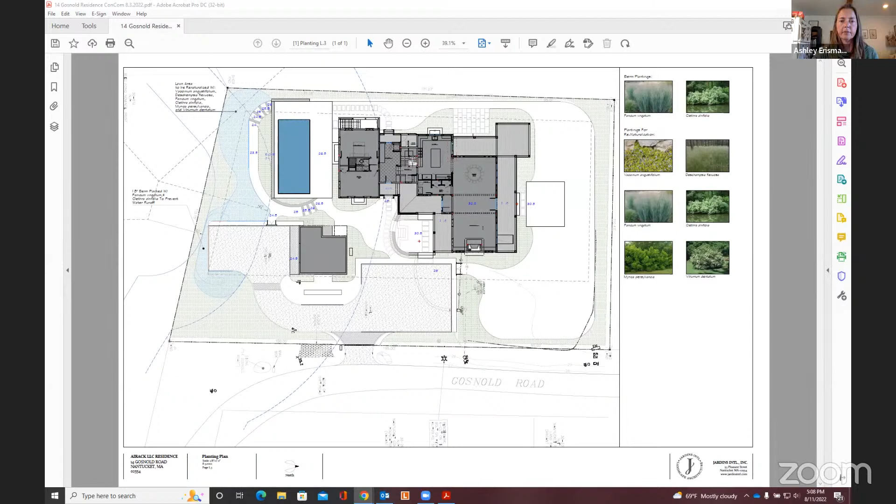Thank you, David. Sorry, my computer's a little slow. Are there any questions or comments from commissioners? Looks like no. So we'll open it up for public comment. And Jeff, I don't know if you can drop the screen share. Perfect.

It does not appear that we have any public comment. Jeff, do we have everything we would need to close?

Thank you, Ashley. I just wondered, David, what the proposed path is in the 25 to 50. Did you tell us? I've already forgotten. It's just a gravel path, pervious, not. There are a couple of step stones, similar to a dry laid stone path, but that's it. Great, thank you. Any other questions or comments?

Jeff, do we have everything we would need to close this one? David, would you like to close? Yes, please. Is there a motion to close? A motion made by Mark. Is there a second? Seconded by Ian. So by roll call vote: Beal, aye. Erisman, aye. Golding, aye. Misurelli, aye. Plendowski, aye. That carries unanimously. Thank you, David.

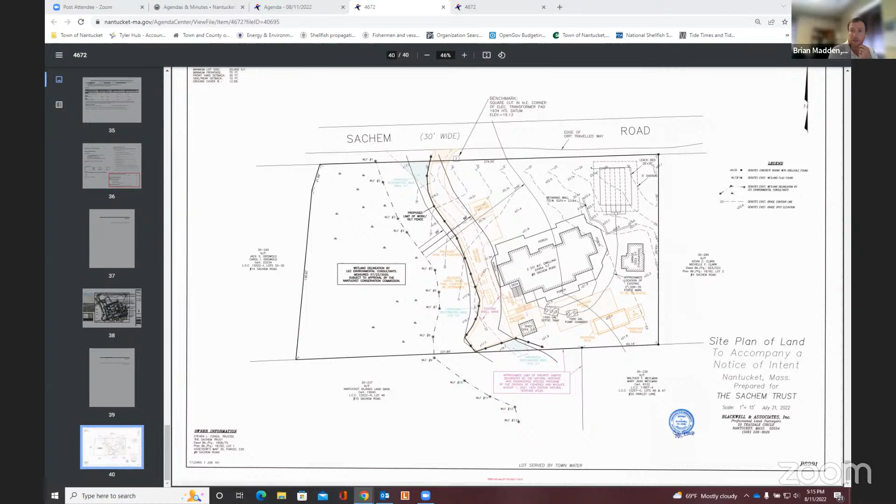Thank you, Brian. Are there any questions or comments from commissioners? Mark, and then Ian, I'll go to you.

Yes, thank you, Ashley. Brian, tell me, how extensive is that gate project? I've seen some rather impressive gates on Nantucket now, and I want to make sure that's not a structure you're building there. Sorry Mark, could you clarify the gate you're referring to? Well, one of your arrows says entry gate. Oh, okay. Those can be extensive - wood structures, concrete bounds, concrete posts, electric gates, keypad. It can be a big deal, and I hope it's not, but tell me what's going to be there. Yeah, my understanding is just a simple swinging wood gate.

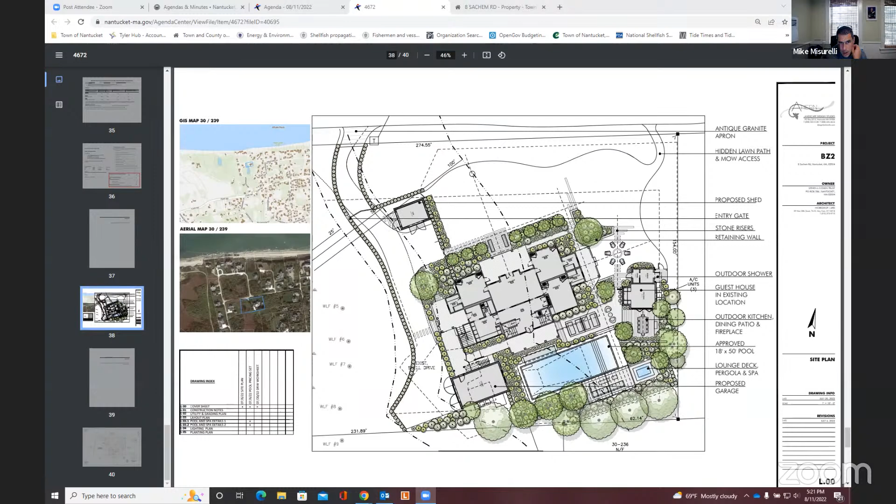Thank you for that question, Mike. And I think, Brian, especially given that this is in that kind of area that may need to be restored, we need a native species there. Ian?

Thank you, Madam Chair. So, Brian, that would explain why the porch in the existing dwelling is now inside the 50, because the delineation has been changed. Exactly, yeah. I looked back at the older plan of record for that and it was outside the 50 when it got previously approved, but with the new delineation that I did, it's now within the 50.

So I strongly echo Ashley's comment about the amount of modification in the 25 to 50, because we've been discussing in our new regulations dropping it down from 50 to 25%. So if we had changed our regulations, this would be a different discussion. I would urge your client to reconsider some of that, please. Point taken.

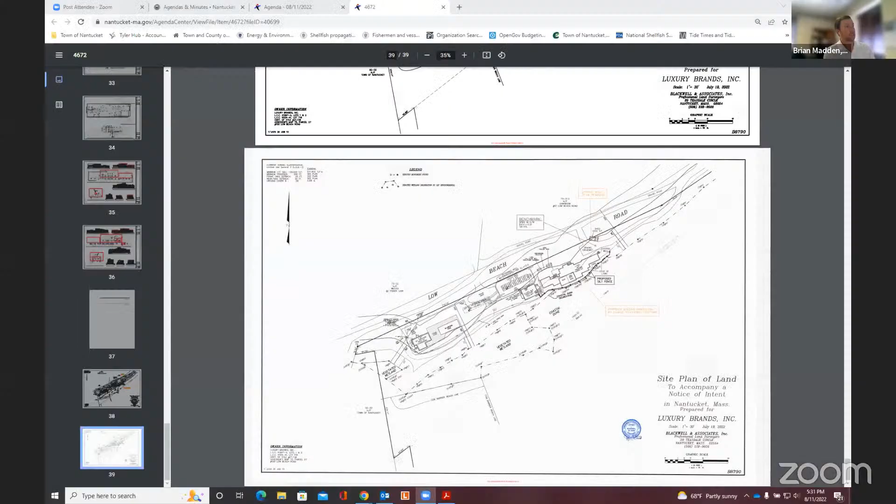The project has been approved by HDC recently, and portions of that do occur within the 50-foot buffer zone to the coastal bank and the coastal dune. Because we're not doing any modifications to the footprint, we did, as kind of a conservative measure, request a waiver if that was indeed required.

But the vertical renovations themselves won't have any adverse effect on the resource areas. All work will be contained within the existing developed conditions, defined by erosion control barriers. Temporary disturbed areas will be restored in kind.

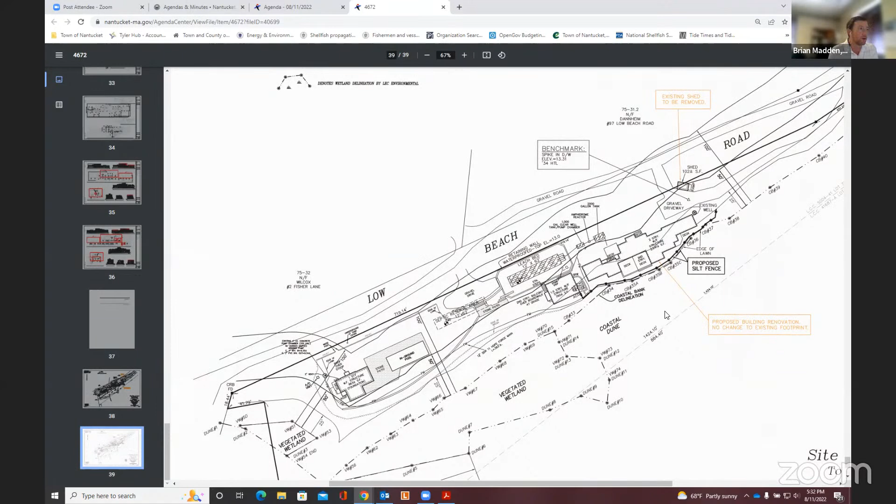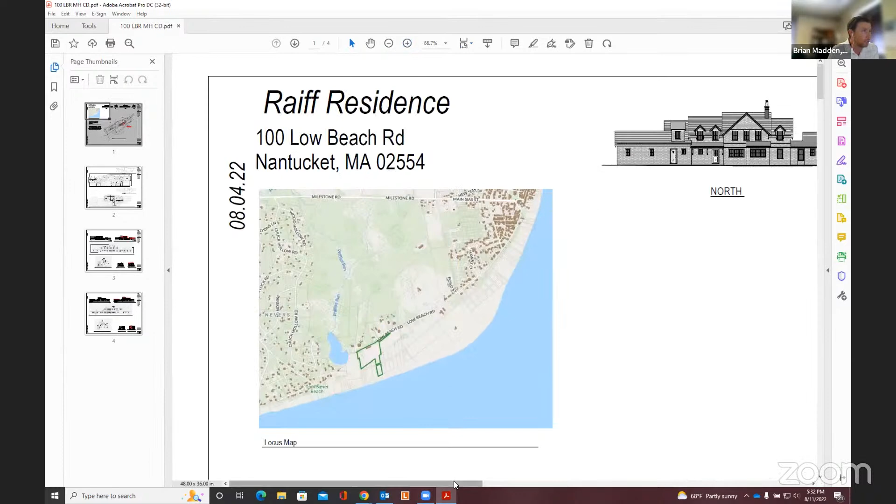While nominal, we are proposing to remove 74 square feet of decking at the front entrance that's within the 50-foot buffer zone and replace it with a dry laid stone patio entrance in a different location. That is on the north side, away from the resource area, but it does result in a minimal structural reduction in the 50-foot buffer zone. But again, no footprint changes.

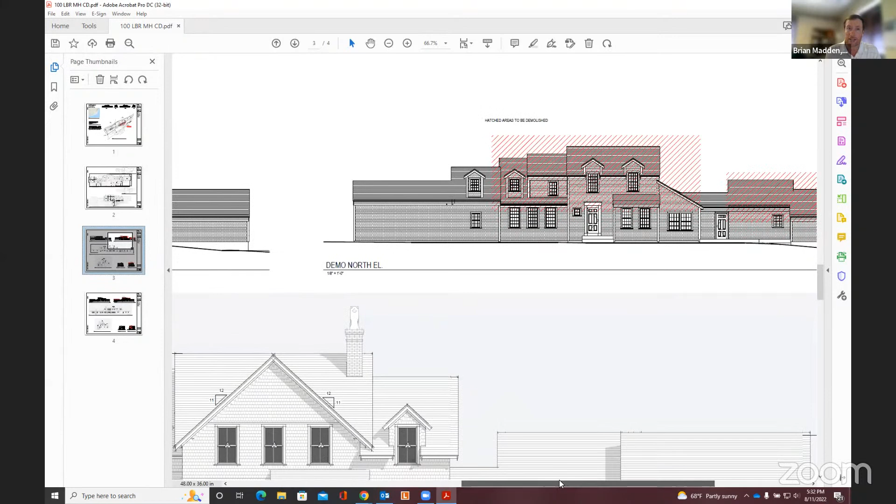The foundation's remaining the same. It's just some vertical renovations that are highlighted on these HDC drawings. Thank you, Brian.

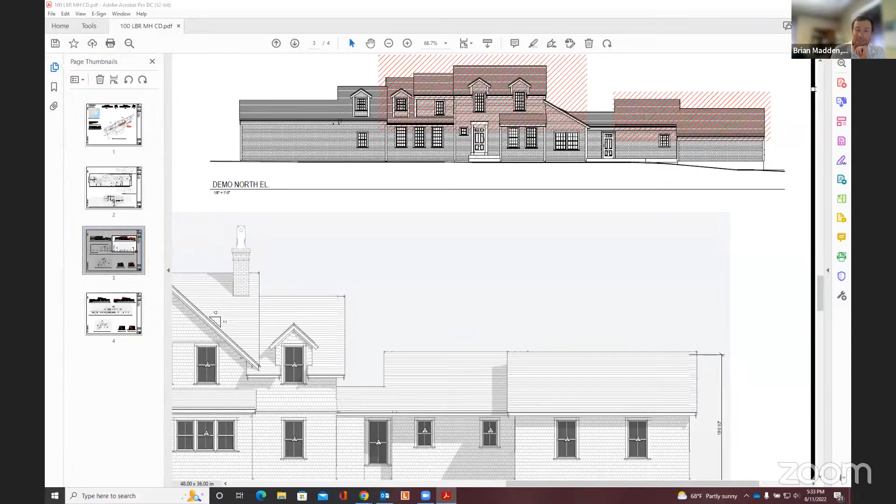And I understand it may be difficult to wrap your head around the architectural stuff, but it's just basically some expansions on the second story, basically, and changing some of the roof line pitches. And again, that has all been approved by HDC.

Yeah, Ian, go ahead. Well, it's increasing the mass in an area that, I happen to own property back in the day across from there, more or less. And I find it very distressing, but we have this scenic view as in the eye of the beholder. So I really don't feel that I can make a strong enough argument under the circumstances.

But I think it's very unfortunate that it's steadily getting larger and larger within its existing footprint, because they know that we're not going to grant anything else. So yeah, that's my 2 cents.

Ian, I hear you loud and clear. And wetland scenic views was something that I was taking a look at as well. I guess as we look from the roadway itself, from any public streets or beaches, the existing vegetation between Low Beach Road and the house is relatively robust. And under existing conditions, you can see the top of the roof line, but you can't see the ocean or the expansive dune system.

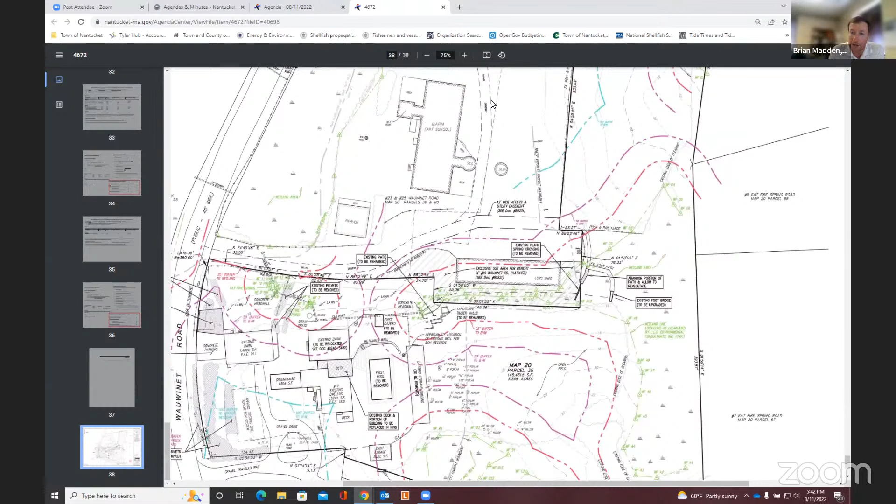There's a diverging path with some wooden board planks laid down over the stream. We're proposing to remove those board planks and then abandon that secondary spur, allowing it to naturally revegetate. So there's only that one connection point to the north.

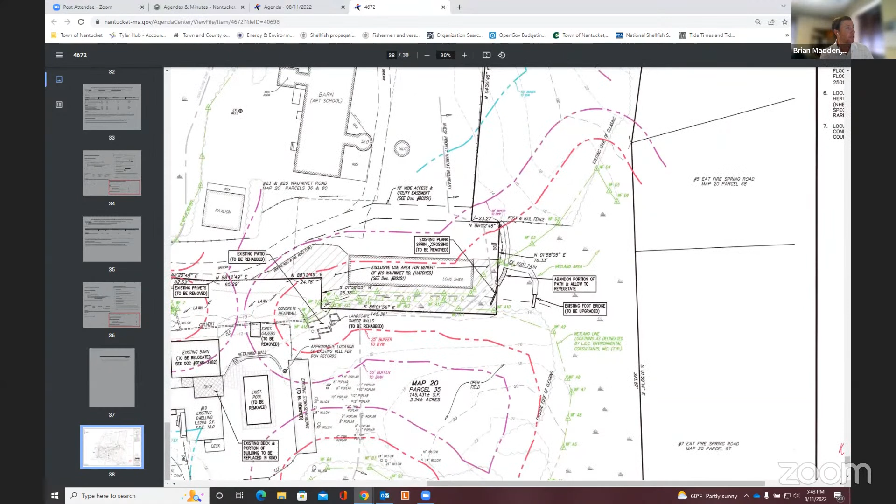Let's see, I think that reviews all the work improvements right now. Portions of this do occur within the 25-foot buffer zone, including the removing of the landscape privet.

So we have requested a waiver for that. There's going to be further landscaping designs that will be forthcoming. But again, the major impetus for this application is to piggyback on all the structural demo removal work that's occurring here. Once all those landscaping details are finalized, an amendment request will be filed.

Thank you, Brian. Are there any questions or comments from commissioners? Mike?

Thank you. Brian, just building on your comment about the details of the landscaping, and Ashley's comment from the low beach road we just looked at, it seems like it's all net improvements and it's going to be nice. The only thing I'm wondering is, since there's so much going on at that property from a wetlands point of view, how they intend to do some of that work might be helpful when they come back with the landscape details, as far as what pathways they're going to take and what areas are going to be disturbed.

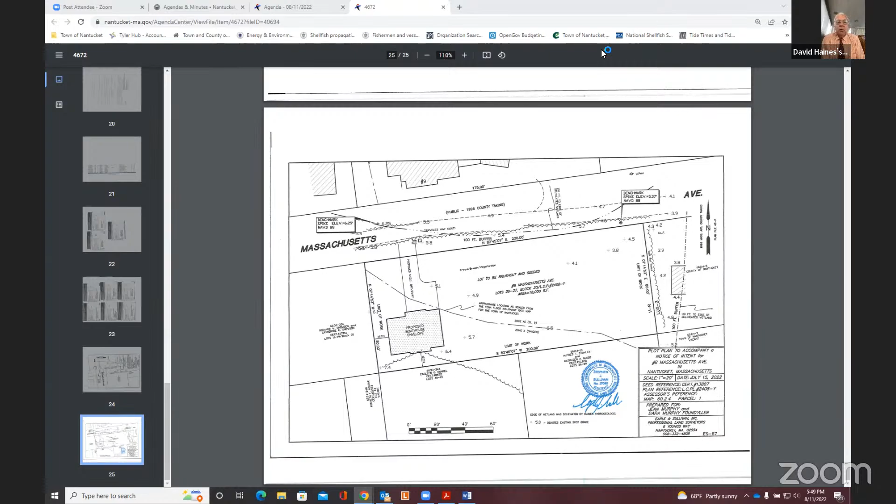The vegetation that's out there is very dense, a combination - there's bayberry, some scrub oak and pitch pine saplings, Rosa rugosa, very thick areas, some looks like Russian olive. But they want to just open it up and make it into a meadow. And that basically is the extent of the project. It will not affect it. No waivers are required. It's not within natural heritage.

It's not within the buffer zone, so there's no requirement that anything be within 2 feet of the water table, outside of 2 feet of the water table. However, any foundation under there will be well above the water table. No dewatering, no waivers, and minimizing soil disturbance and reestablishing a vegetative community.

And so with that, any questions, I'd be happy to answer. Thank you, David. Ian, I see your hand up. You do. Thank you, Ashley.

David, so it's nowhere near the water, so how is it going to be a boathouse? Well, it's a place to store a boat, not a boathouse on the water. I didn't mean to imply that, but he wants a place to put his boat. So let's call it a garage. If that, I'm not going for a water dependent use. I'm not asking for that, but I'm just describing.

All right, well, thank you. I was slightly puzzled.

He wants to build it like the one next door, which is the guy who has a boat in it. And actually, if you look at their house across the street, their garage has a boat trailer tongue sticking out through the door. So he wants to have a place to put it where he doesn't have to cut a hole in the door.

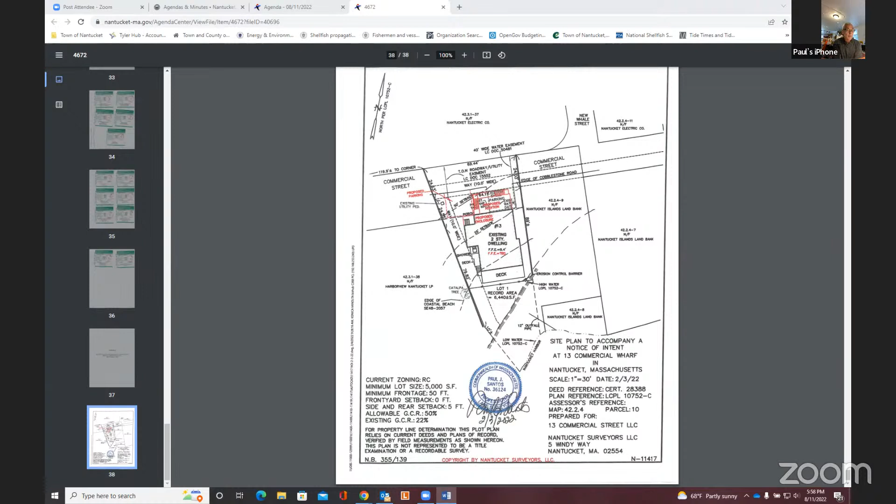If I can track back and give you an idea of where the building sits with regard to the resource areas: the building as it sits today is completely within the 50-foot no-build. If you look at the plans, you can see the edge of the coastal beach tracks underneath the existing building. We showed the 25-foot setback, which is within the existing building, and the 50-foot setback extends up to Commercial Street in that area.

We are currently looking at our different options with regard to FEMA, because right now this is shown as within a velocity zone. The difference between the velocity zone and the AE zone is fairly significant with regard to the ultimate building height. When talking about a velocity zone, I did a check on the harbor area, and I don't think we've seen anything yet within the harbor that's come into compliance with the current velocity zone standards.

The work done on Hulbert Avenue, and some of the historic work on structures in the Easy Street area, had exemptions with regard to the heights they're built at.

The difference between the velocity zone and the AE zone is as follows: if you're in an AE zone, like our typical Hulbert Avenue area, under the 9th edition of the building code you're required to build your first floor at the flood zone elevation plus 1. When you're in a velocity zone, your elevation needs to be flood zone plus 2, but that's to the lowest structural member. So there's a significant difference—in this case almost a 5-foot difference between this building being in the velocity zone versus the AE zone.

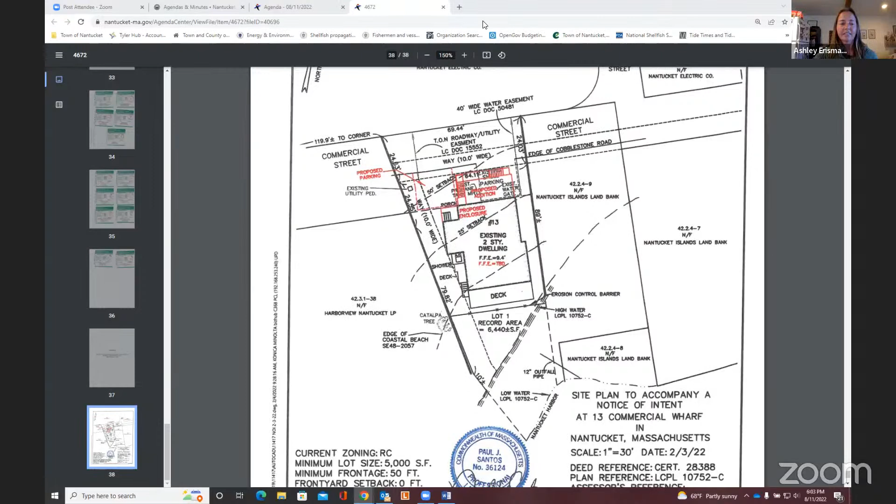Okay, thank you. So I guess I don't know what you feel might be appropriate, Ashley, whether we look at the enclosure, the second floor, and then maybe we talk about the addition. I think it may be better to take each one of these separately and get the board's feedback on what the proposal is. Okay, yeah, I think that's fine. I realize this is the first time we're hearing this as essentially a new application.

I personally feel the addition is a major sticking point. It's a no-build zone for us. The structure is within a resource area. So although I'm all for permitting this to get flood compliant, I would not be able to approve the addition in the front, in the no-build zone.

If I can please address that concern, I understand not wanting to overbuild this area, but given that we are next to Harborview cottages that are even further toward Commercial Street than we are, and the neighboring property, which is further, as well as the rest of the boat basin, if you look at the streetscape and the rest of the street, it actually lines up. It will not look like it's too much.

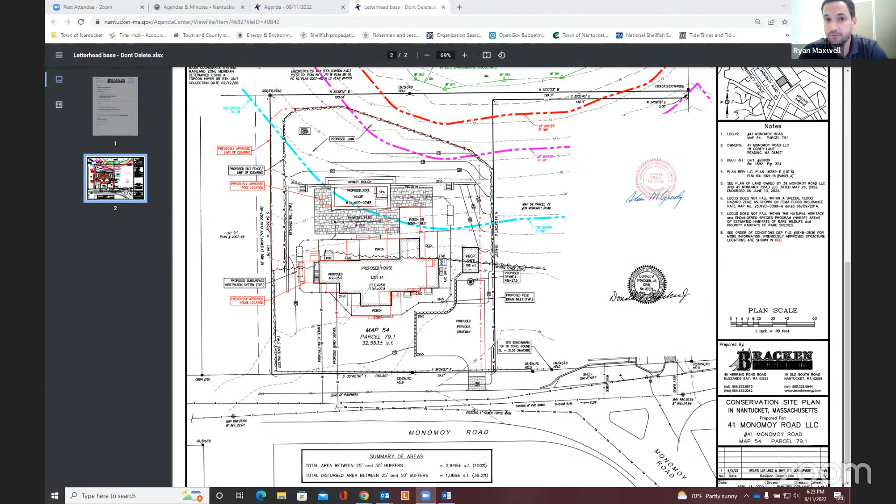I'd be happy to answer any questions you may have. Thank you, Ryan. Are there any questions or comments from commissioners? Looks like no. Jeff, do we have everything we would need to issue the minor mod? You do. All right, Ryan, would you like us to issue? Yes, please. Is there a motion to issue? Motion made by Linda. Is there a second? Seconded by Mark. So by roll vote: Beal, aye. Erisman, aye. Golding, aye. Misurelli, aye. Landowski, aye. Williams, aye. All right, that carries unanimously.

Thank you. That moves us on to certificates of compliance. We have first Nantucket Islands Land Bank at 158 Orange Street. I don't know, Jeff or Rachel, which one of you would like to go through it? I can go through it. That's fine, I think Rachel may just be listening in. So 158 Orange Street, that's the property that was formerly the Backman property, across from Foods.

That permit was originally to take up the asphalt driveway, convert that to gravel or pervious surface. They did a bunch of plantings, removed some existing retaining walls that were going down the back way towards the creeks, and then redid some of that elevated walkway to the dock. And if you guys remember, in June of this year, we approved a minor mod to include a bench that may or may not have ended up in the 100-foot zone. But they have completed all of that work, and after our inspections, we have determined that they're in compliance and are recommending that it can be issued. Thank you, Jeff. Are there any questions or comments for Jeff?